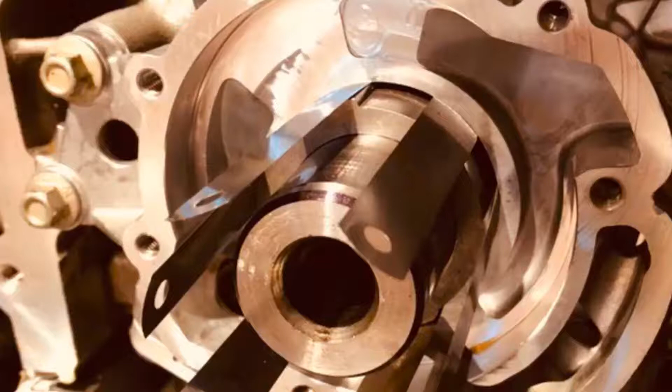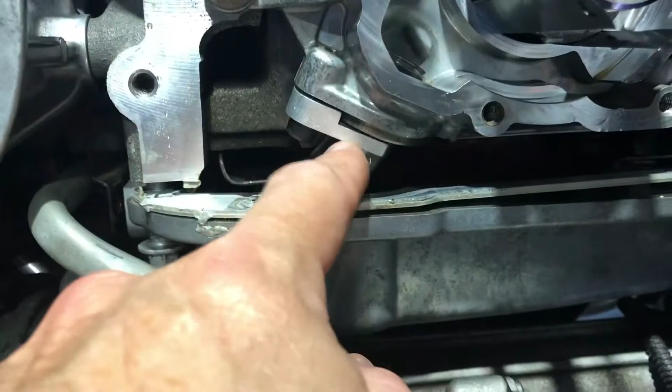So right here what you're seeing is I'm centering the rear portion of the oil pump to the crankshaft, and I'm using feeler gauges all the way around. You'll also notice this piece, which is still loose. That's an aftermarket part called a girdle. It helps support this side of the oil pickup tube, which has a bolt hole, but no bolt and no way of mounting the pickup tube to it. So it's insurance in case this bolt back here ever falls out.

I haven't tightened it up because I want to get this bolt in, make sure everything's lined up in case I need to remove any of this. So anyway, let me do a few more things on it. I just have these barely even tight. I can't loosen them with my hand, but they're just there. And I have between 2.5 to 3 thousandths all the way around is what I'm pinching.

So I'm feeling to see if there's tension on some and not on others, that I need to kind of give this housing a little nudge to loosen up the tight ones. See, this one feels a little tight, but that's a 3 thousandths. So that's the thickest one I have in there. So unfortunately I didn't have enough, so I made do. If it's a 0.5 thousandths between them, it shouldn't make a difference. As long as it's not touching, I would be happy with that.

The service manual doesn't even say you have to do this except on the LS7. Well, this isn't an LS7. I imagine if it was off a little bit, that these grooves here would just end up wearing into the aluminum housing. It's quite soft, and that's probably what they do at the factory. A little bit of wear there to seat. So let me work on it a little more, and I'll bring you back for more video.

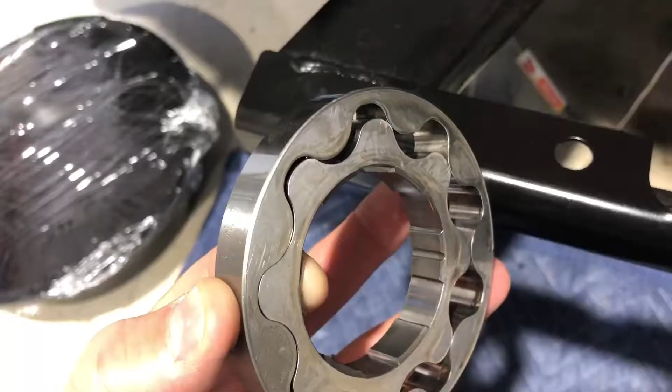I was pretty careful with this when I took it out. I didn't separate the two. I didn't want the top and bottom to be different in case there was any difference in wear. You see the notch right there? I'm not seeing any kind of key on the shaft, so I'm assuming, until I look in the service manual, which I will before I button everything up, I think that is just for oil passage. That may be a bunch of baloney too, because the whole thing's in oil.

So, but this is the back side you're looking at, and I'm going to fit it on there and hopefully not drop it. Yeah, I better do this with 2 hands. That slid right in there. You can see that notch. So I'll look in the adjustment for the LSA and see if it says anything about that. So this should be good. I should be getting a good feeler gauge in here all the way around, and I'll check that as soon as I check the service manual first.

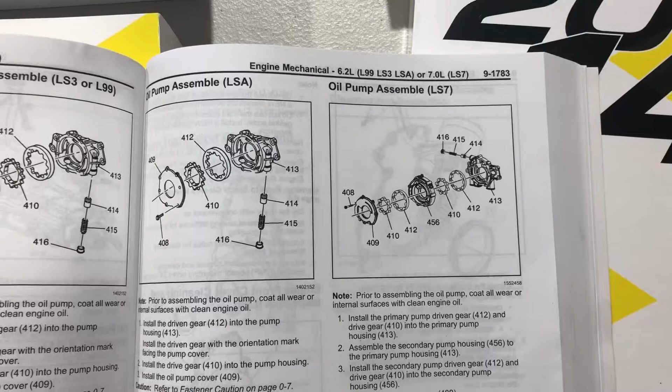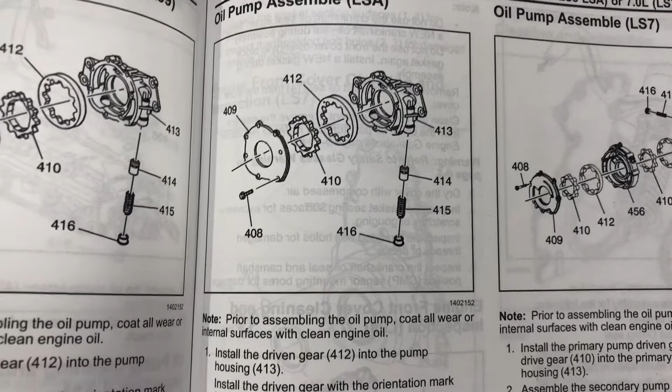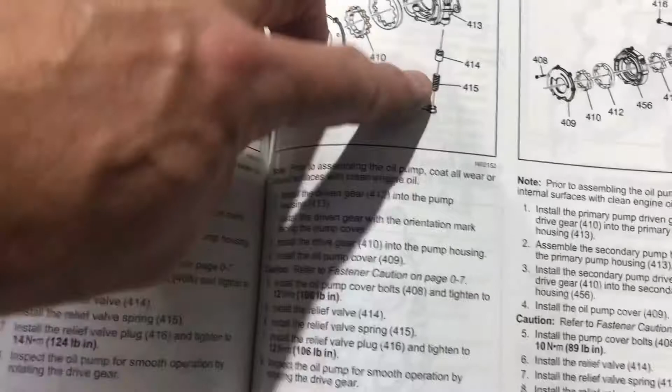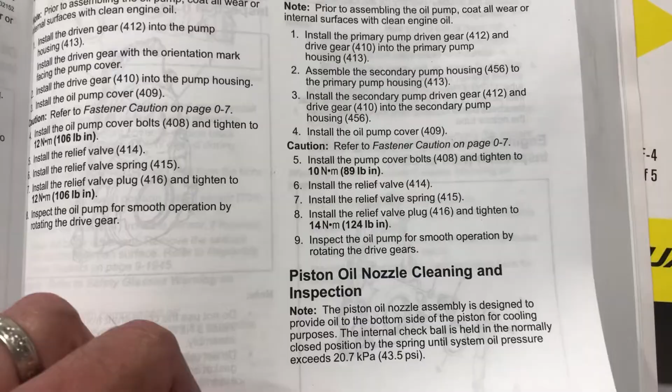All right, well, instructions for the LSA right here. That's for the assembly. So the cover bolts go to 106 inch-pounds when I tighten them. I didn't take the relief valve out. I don't see any real difference on this side. It doesn't say to use shims or anything that I see. So, you know, you hear stuff online and sometimes it's right. Sometimes it might be old ways of doing things.

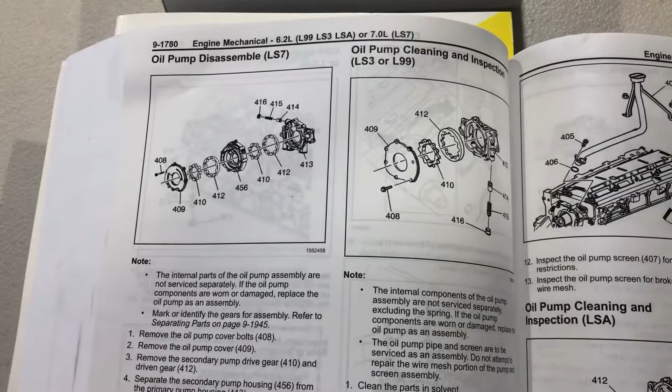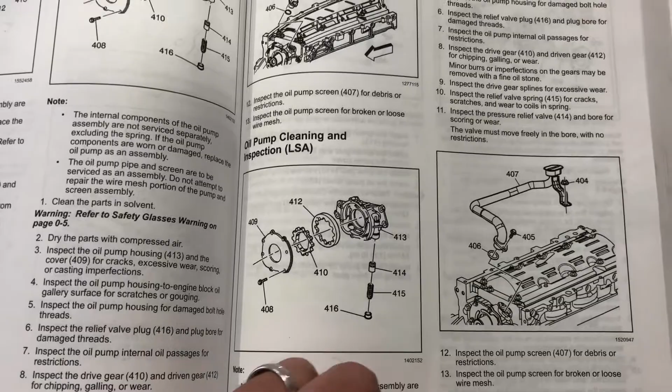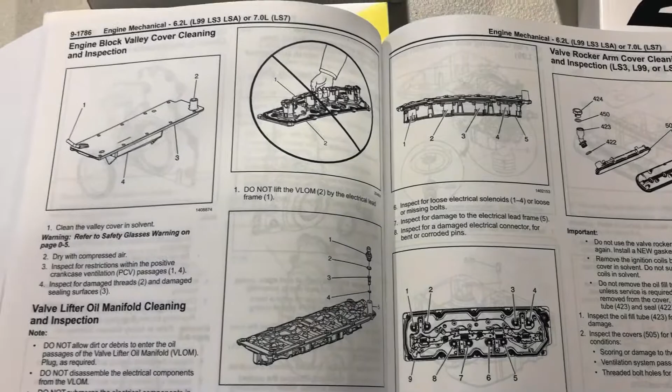But I don't see anything in here saying that I have to measure off the crank. I think it's a good idea, especially if you have some feeler gauges that you can put in there and get everything evened up so you don't have a wear-in situation and make things even more sloppy. Well, let's see how the gerotor looks with the gauges.

Okay, so now I'm testing in between the inner gear and the crank. This feeler gauge is 2/1000ths. That slips in. All these are 2/1000ths or 2.5/1000ths. So all these slide in and out just fine. So that feels good. 2/1000ths feels good. So I'm happy with that. Oops, sorry, I'm not paying attention to the camera again, but so at least 2/1000ths all the way around that.

Some people might say, but Mark, the gerotor's moving back and forth. Well, actually, no, it shouldn't be. That seems a little tight at the bottom. So that is tight. I'm not able to get that in there. Let's see what 1.5/1000ths is going to look like. Let's separate them here. Here's 1.5/1000ths. It's like tin foil. So 1.5/1000ths slides in there.